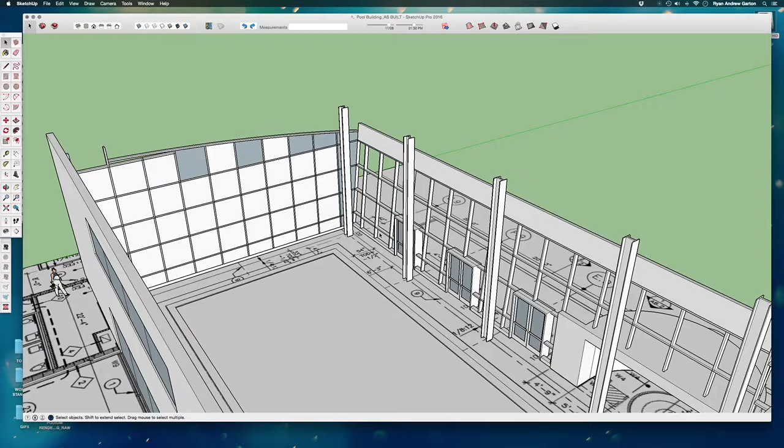All right, off camera, I just added the last little pieces of glass into place. Let me go ahead and hide this column again. Now what I want to do is, holding shift down, select

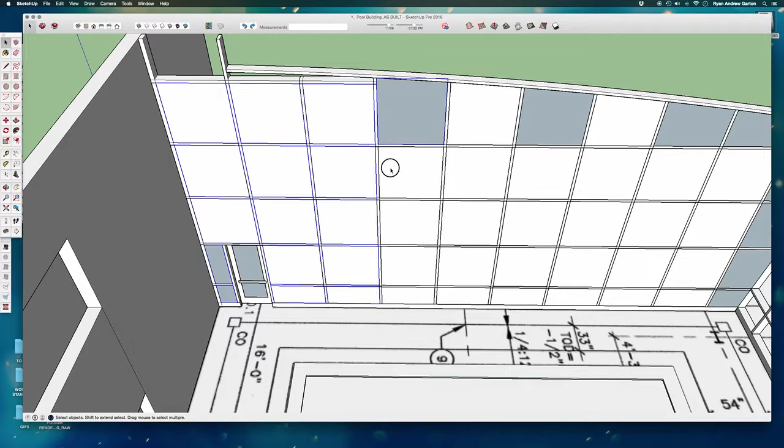each pane of glass, just clicking as you go. So I'm going through and selecting each one, again holding shift down so I've got all of them. I'm basically able to add to my selection.

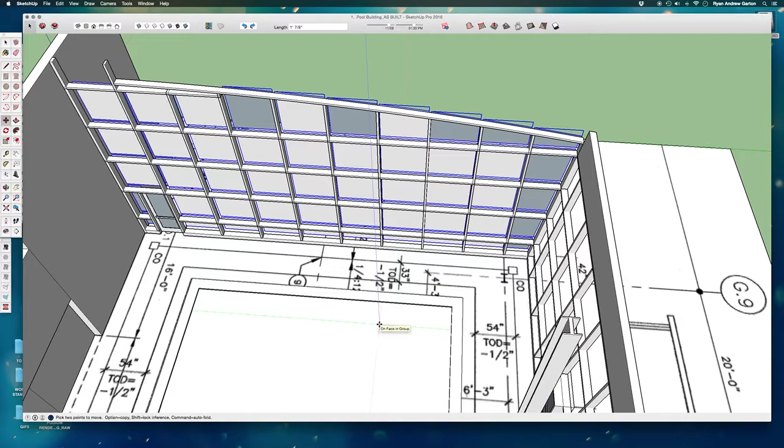Now that I've got them all selected, I'll move them back into place. I'm going to move them back 6 inches.

I'm also, while they're selected, going to group them so that if I ever want to hide this all at once, it's going to be a lot easier to do so. Okay, so I've got my group of glass now.

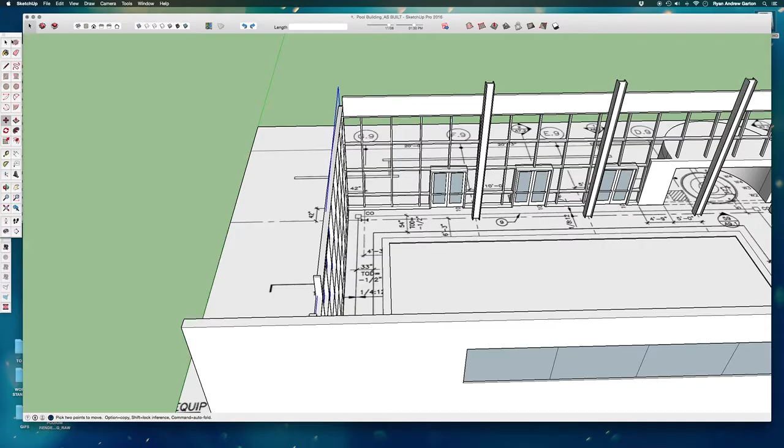All right, we only have one more wall to fill in. Before we do, I can see where I'm going to have a little bit of an issue when it comes to filling in the glass, and that's this section right here.

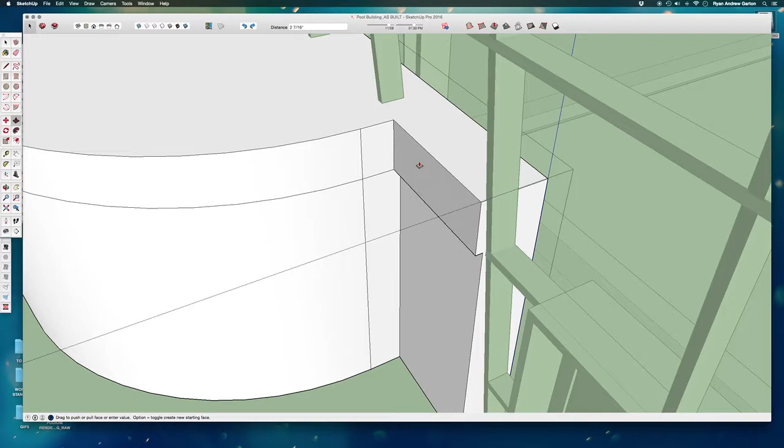So what I want to do is open this up, this solid piece, and push this plane back into place a little bit. I'm going to have to do it in 2 places because I've got a line bisecting it down the middle. So let's go ahead and select that line and delete it.

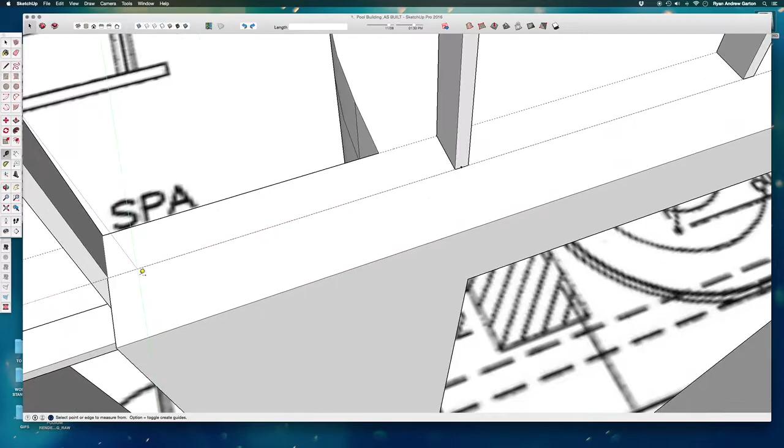I need a little piece to catch down at the bottom. So with the tape tool, pulling back 8 inches, I'll now take my rectangle, start at that intersection, and just take it till this far point here.

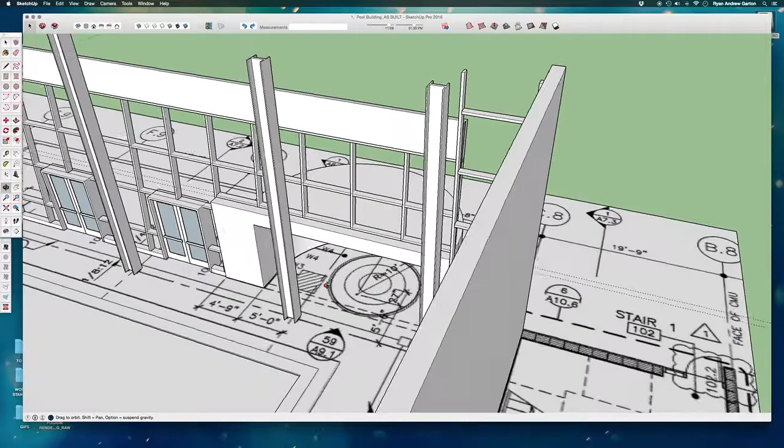Double click on that, make that a group, double click and open that up 2.5. Okay, so all of my seams should be sealed, and it should be easier for me to put glass where I need it to go.

Go ahead and edit, delete guides. Okay, this is going to be a lot trickier because this is now doing glass on a slant, or making a rectangle or a face on a slant.

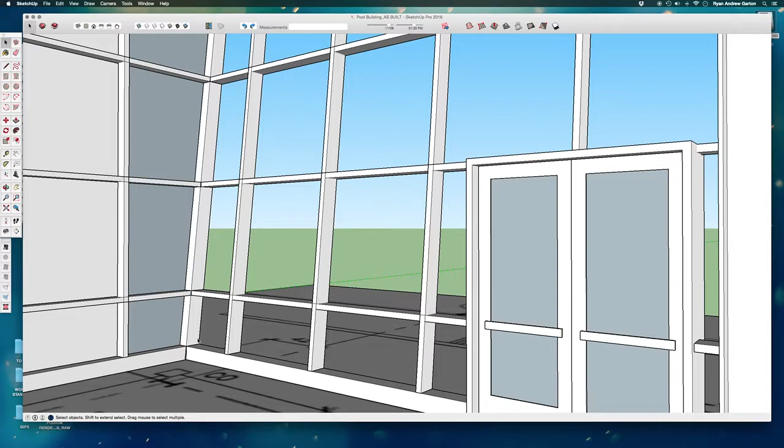So what I want to do is, I really only have 2 different heights, well 3 when I get to this point, but I only have 2 different heights to deal with. I've got this height and then I've got this height. So if I make this section and this section, I should be able to then just scale the other ones appropriately in and out as needed.

So let's start with this bottom piece. Notice that I've got this little tricky edge to deal with. So if I start from this bottom corner and try to draw straight up, it's going to draw it at a slightly different angle. In this case, that's okay.

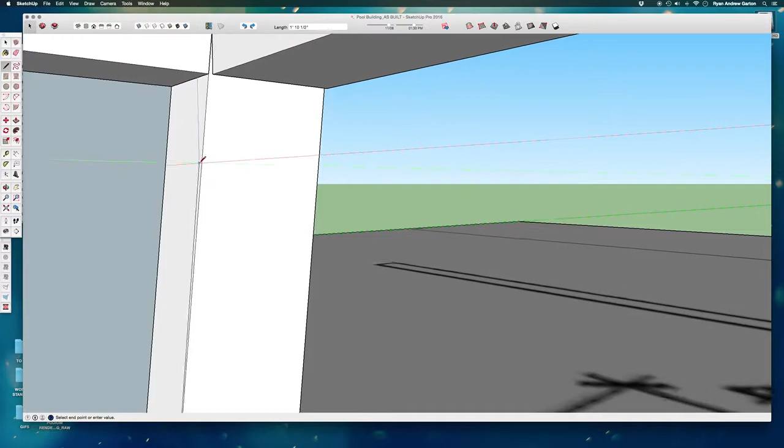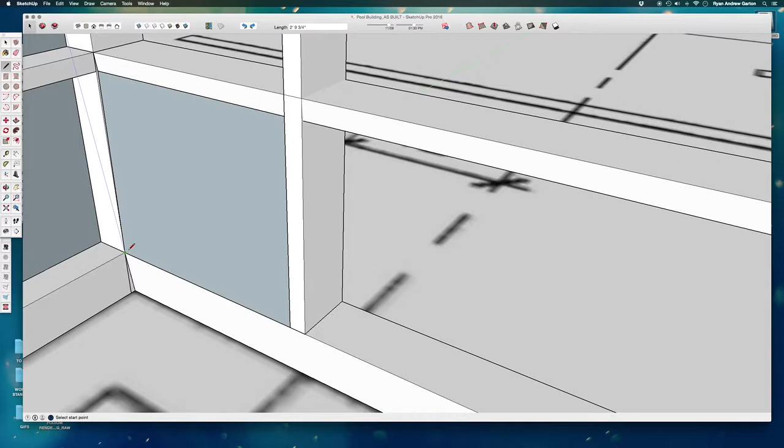So what I'm going to do is just start from this point to that point. I know that this is not completely perfectly accurate, but I think it's going to be way too tricky if we try to do anything in a different way. So we'll go follow along this point to this intersection and then down to this point. Click. So there is my first piece of slanted glass.

Once this is moved back into place, it's not going to read as being off in any way. Let me make that into a group.

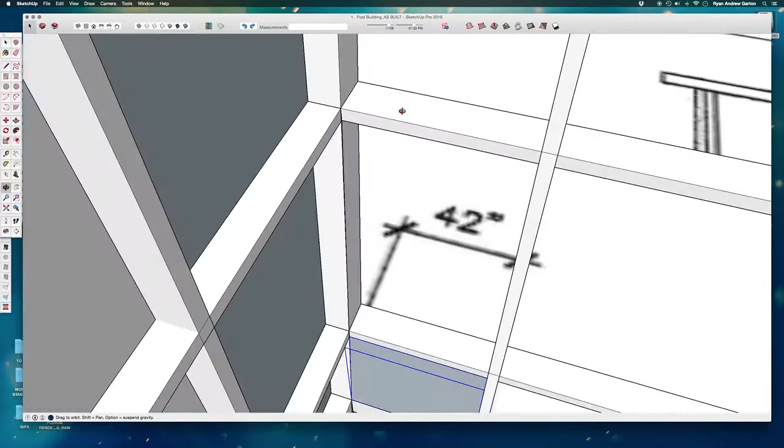Let's do the same thing here, from this point to this point with the line, moving around to that point, down to the bottom point there, and finishing it up. G, to make that a group.

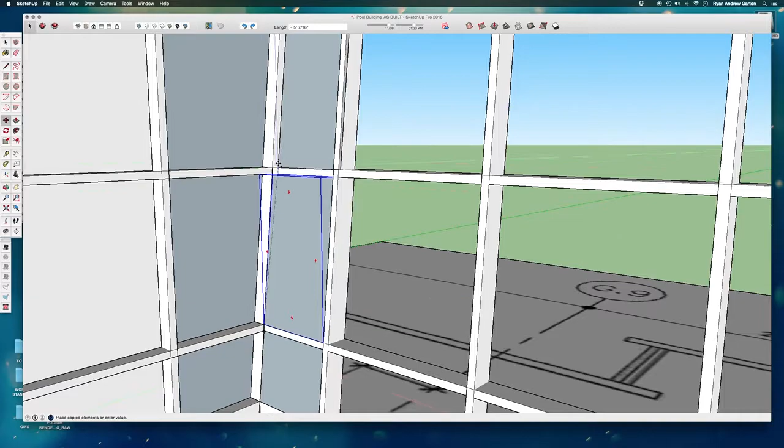So we can easily select this one with our move tool and copy it up to this point, times 2. So there's the glass filled in all the way up to one full grouping of mullions.

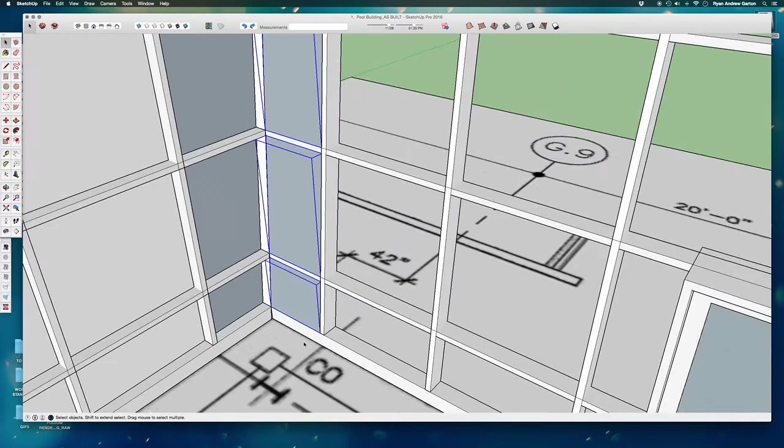Select all 4 of those planes and move them along the red axis until it hits the outside point of this mullion.

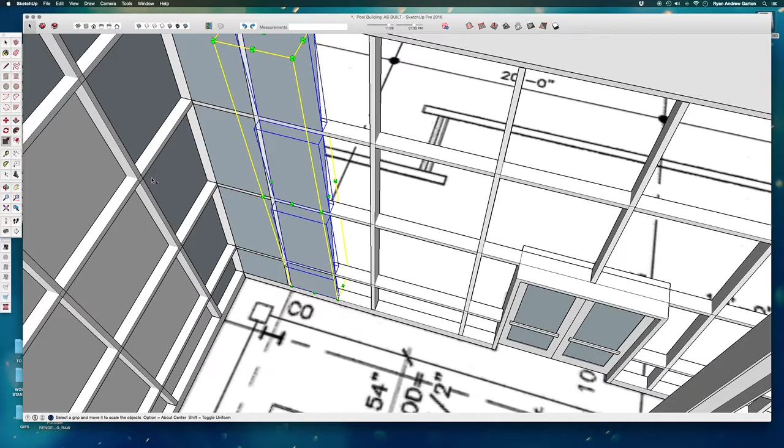Now, instead of opening these up, we're going to scale. So select scale, take that middle scale point and just drag it till you hit that point like that. Great.

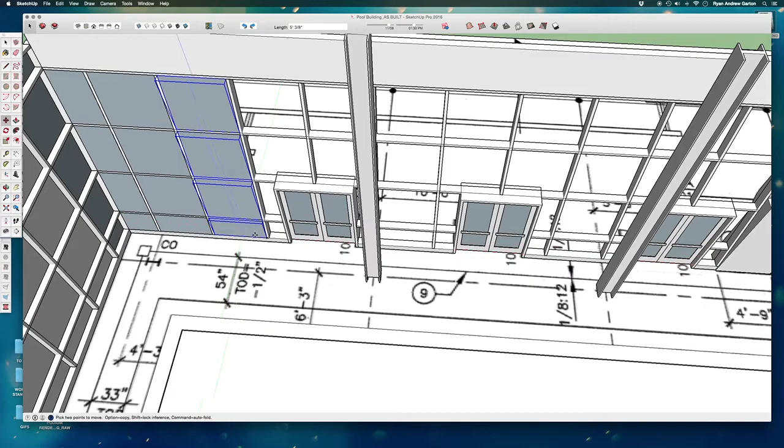Now we can move copy to there. We can move copy to this inner point, to this intersection where there's no doors to worry about. We can move copy to this one.

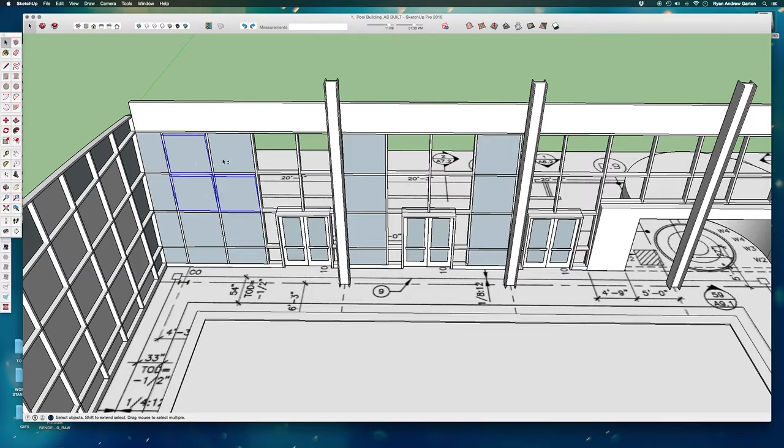And then we've just got a few different kinds of configurations we have to now worry about. The top is pretty clean, so the top I can take these four and move copy from this point to this point. Click. And I can do it again above this door. Click. Times 2 will also get them filled in above that door.

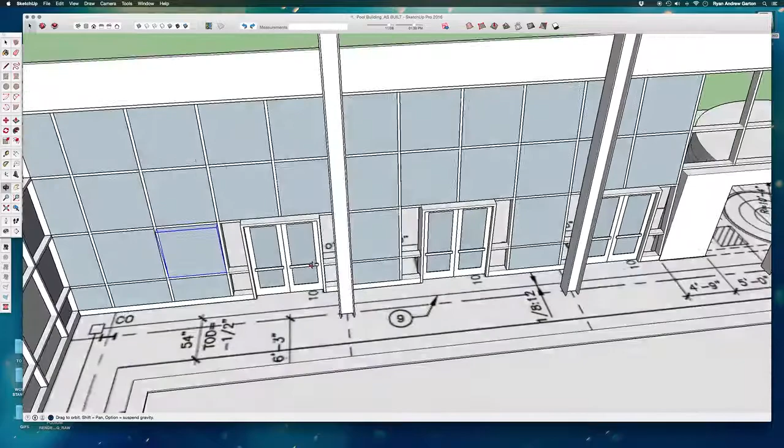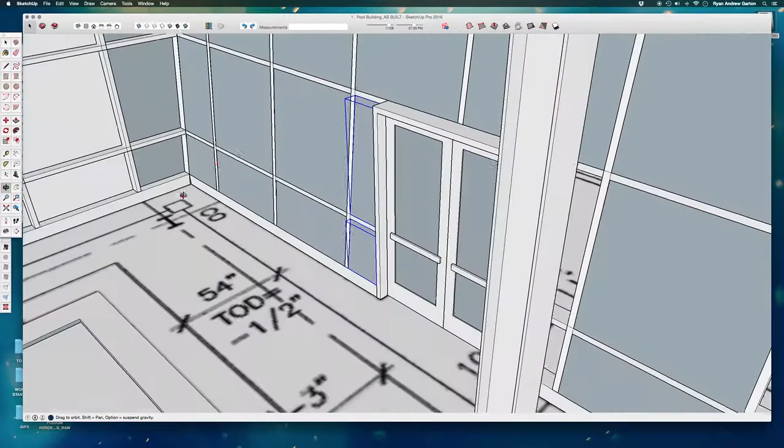This one's a little different because here we've got some skinny ones. So what I'll do is take these two, select them both, move copy from this point to this point, and then using scale, scale that in to hit that point like that. So that's going to fill in that little gap. We don't have to worry about the fact that they're slanted, which is great.

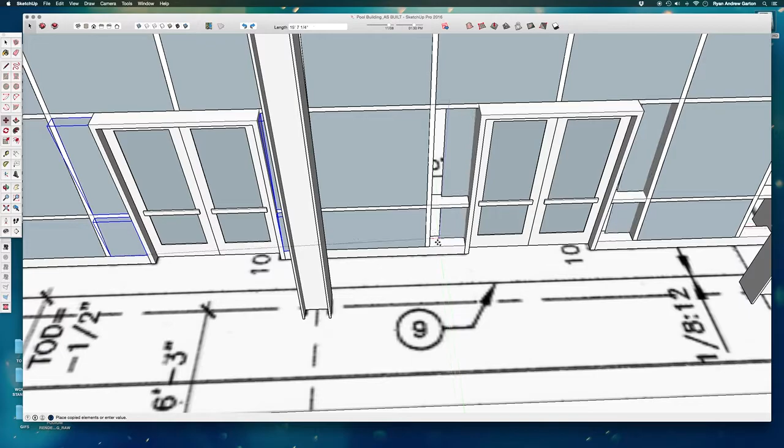Now I can move copy to that point because those are both the same size. Now we've got the two sides around the door dealt with, and we can copy those over by selecting all four, copying from this point to that point, and then times 2, enter.

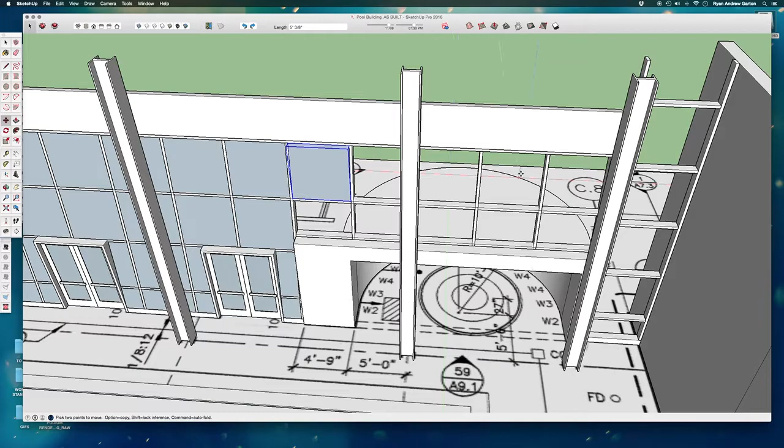Okay, great. So we've basically handled all of this whole side. The top is easy. We can just select this, move copy, click, times 1, 2, 3, 4, 5, times 5, enter.

Great. Here we have to redraw this one because this one is a different size. Actually, here's what we're going to do. We're going to try something new. We're going to select this and copy it over using that reference point to that reference point.

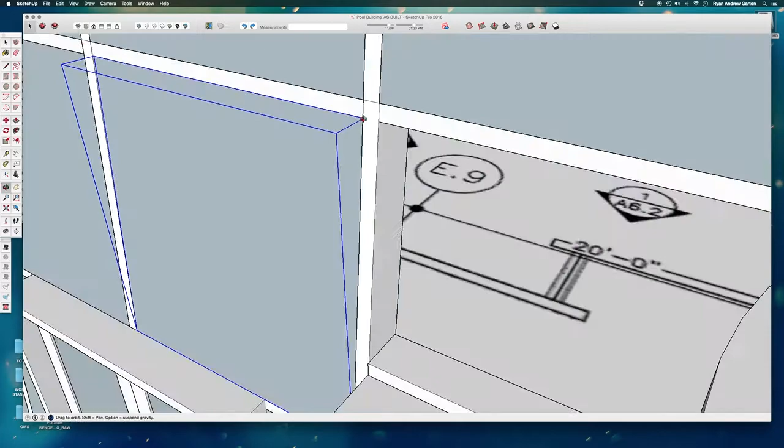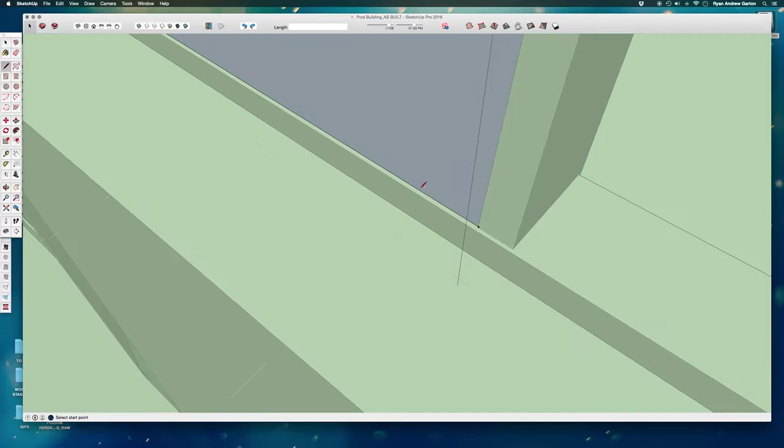Then we're going to open this up by double clicking. Take our line tool, get nice and close. This is really important that you get close because the lines are not perfectly meeting up here. Again, if we were really taking our time on this model and making it super, super perfect, we would take the time to do this. But we really just don't have that kind of time in this class, especially for all the stuff we want to get to.

Now I can select what I don't need, which is all the stuff at the bottom, and I can't really see that unless I hide this. So I'll open this up, select this, and delete it.

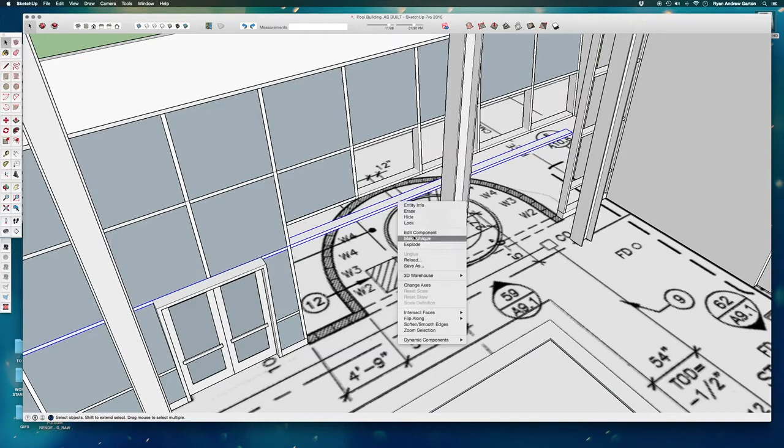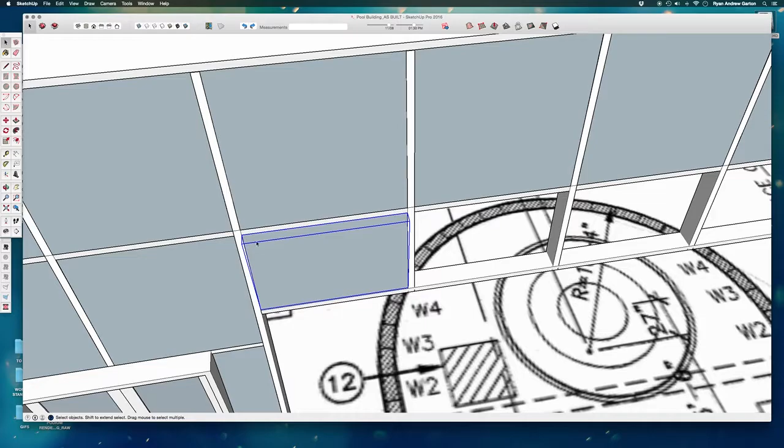And in fact, let's go ahead and select this while that's open. Make this unique. Open it up and push-pull it back because we don't want this to be penetrating that big shape. So we'll push-pull it back to this kind of horizontal slanted mullion, I should say. Okay, hide this, hide this column, select this plane and move it

and copy it. 1, 2, 3, 4 times 4, and we're done.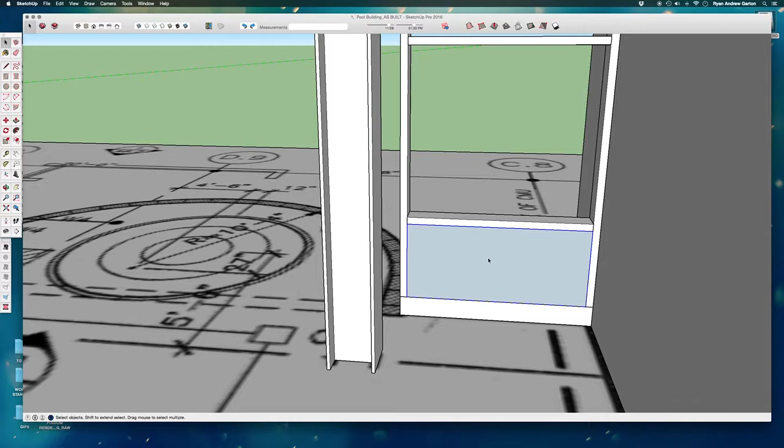This part couldn't be simpler at this point. We just take a rectangle, select from corner to corner, double click to group it, from corner to corner, select, double click, G for group, and then copy this up

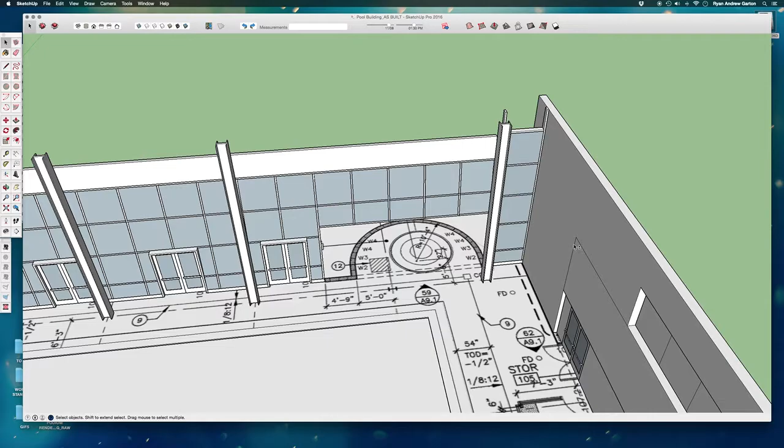times 3. Okay, at this point, we can now unhide what we don't need hidden anymore. We can select all of our glass by clicking on it.

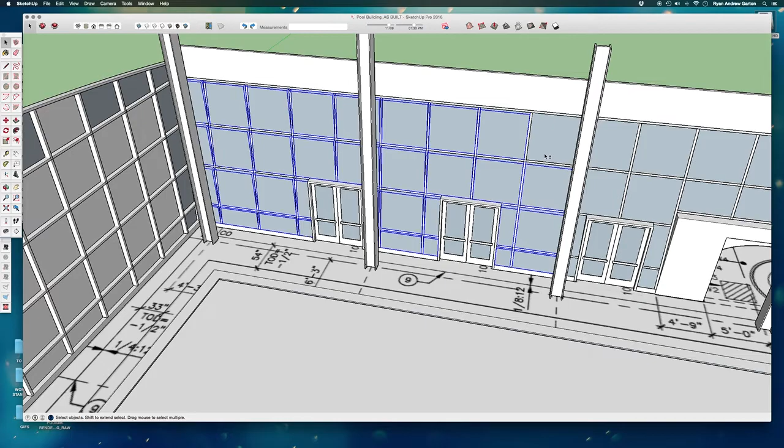And we're going to do exactly the same thing. So we're selecting all of these different groups. It's a little tedious at first, but once we've got it grouped, it's not going to be a problem anymore.

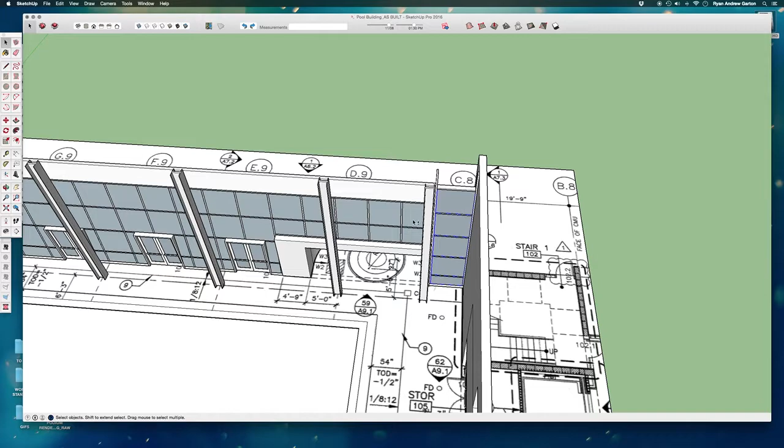And I'm going to make that into a group, and then I'm going to make this one into its own group because this is kind of a separate little system. So I'll make that into a group as well. Okay, so I've got this group and I've got this group. I can select them both, move them back along the green axis 6 inches, and we are in business.

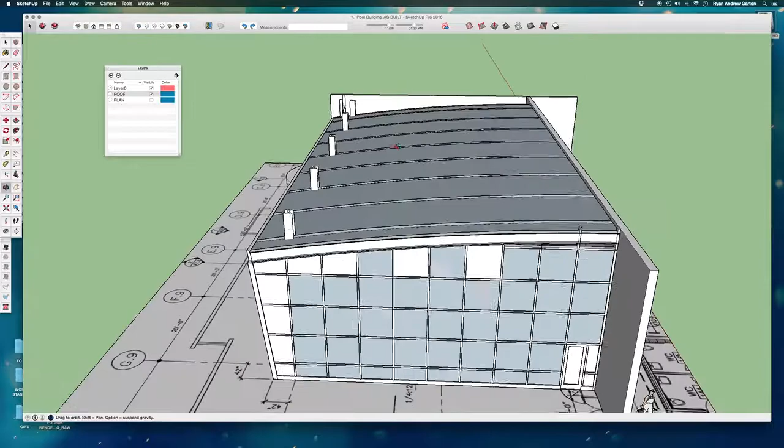Okay, all that's left to do to give this model a little bit of life is to bring in some materials. But before I do that, let's go ahead and unhide the roof. So I'm bringing my layers up because, as I recall, these beams are going way too high. So I'm unhiding that roof, opening these beams up, and push-pulling them down just a little bit. They can come through the roof a little tiny bit because we'll never see them.

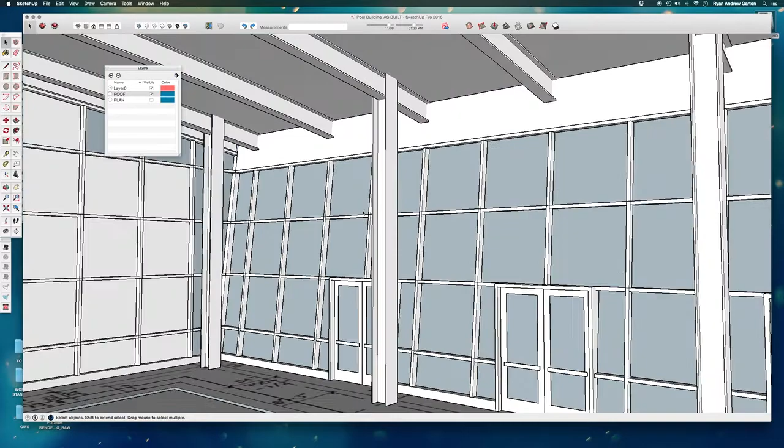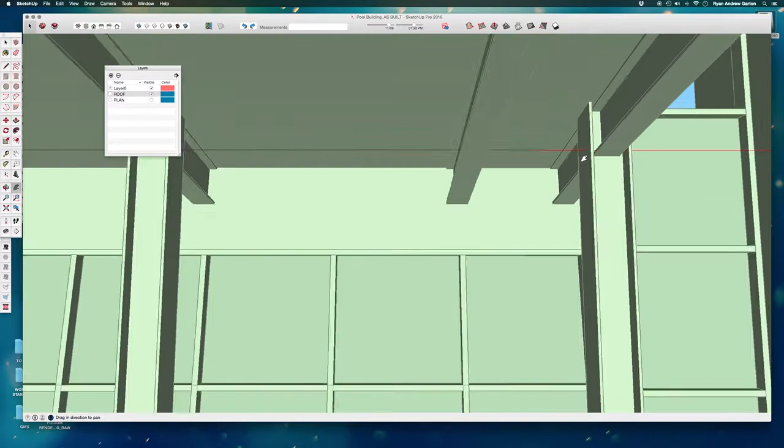And now I'm coming down underneath. And as I recall in the photos, there is a, whoops, zooming in. As I recall, there is also a beam that runs across this point. So I'm just going to visually put that in by drawing a rectangle here, making it into a group, and push-pulling it. Notice I'm panning as I do this. I'm going to pan all the way across to this far beam here, this far column, I should say, and just push-pull it there.

Okay, so now we're ready to get some materials put into place.